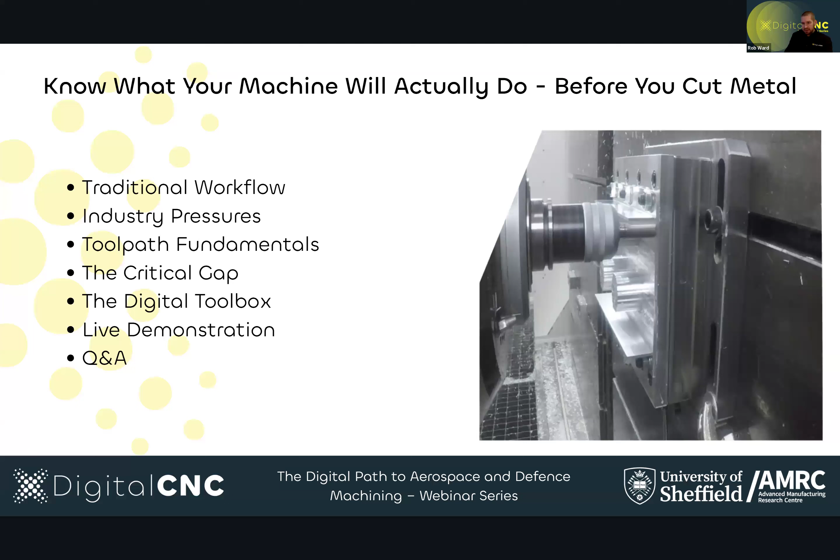So without further ado, this is an incredibly simple slide of what the traditional workflow has been for many years. So this is CAD, CAM, CNC. I've divided it into 2 colors to start off with. On the left hand side, you can see I've highlighted in yellow the digital side of things. So when we change anything here in the digital side, ideally it's free. We know it's not costing us anything.

On the right hand side, in the green there, this is the physical area. So when we want to change something or do anything in here, this is time on machine, this is time on inspections, and this is any iterative stuff we do here where we're not cutting production parts. Effectively, this is costing us time, and this is costing us money as well.

So you can see we go from the CAD model through to CAM, and we take the experience of the CAM engineer, and we do parameter selection, toolpath strategy, etc. We'll post that, so it's a machine-specific G-code, then on the machine we'll listen to it, we'll look and feel. A lot of experience here, could be on-machine edits, back through that, inspections, and then finally, after many iterations, we might be on the way to making production parts as well.

I mean, Rich, is this kind of what you've been familiar with most of your career before you came to the AMRC? Yeah, it relies a lot on the intuition of either the manufacturing engineer or the machinist, depending on how individual companies work and structure how they design the processes to get on machine. But the vast majority of it comes from prior experience and having done it before.

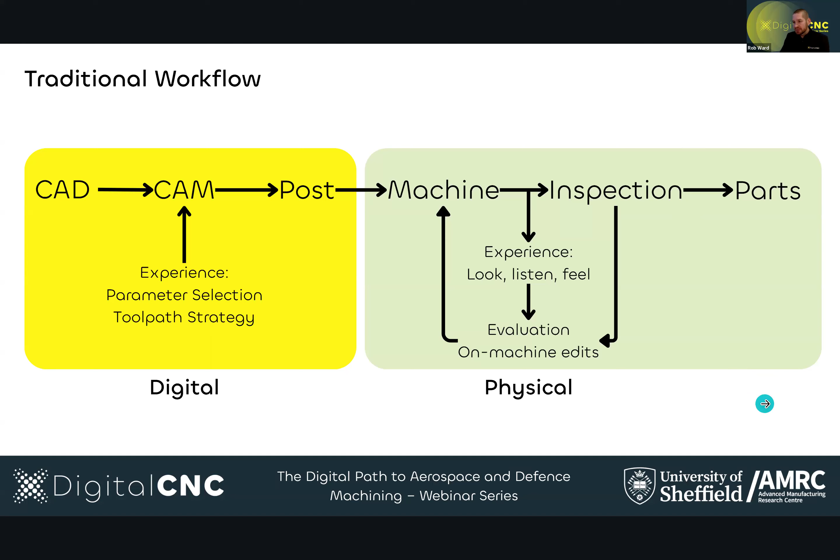So just moving forward a bit, I want to talk a bit about some industry drivers. There's some key changes happening across the aerospace and defense community. Big changes for me include things like new products coming out. We can see here, on the top left, we've got the UltraFan, new gearboxes, which have difficult-to-machine materials. Therefore, we've got new manufacturing processes. We've got the certification requirements. We've got the drive towards digital thread and digital product passports and things.

Then we've got our drive to zero defects, to get things right first time. And right first time we know is absolutely critical, especially for these tier 1, tier 2 suppliers and smaller SMEs. If we start having wasted parts or damage, this is fundamentally critical to their bottom line as well. We can't be doing this.

Sustainability requirements, we know these are coming in. The CSRD directive from the EU will mean that we'll have to do carbon reporting on our OEMs. Eventually that will feed through to our supply chain. It's not quite there yet, but we know a lot of them are getting ready for that. And like we said, probably the most important thing that underpins it all, we've got this skill shortage. So, Rich, from the AMRC's perspective, where do you see these priorities and drivers coming from?

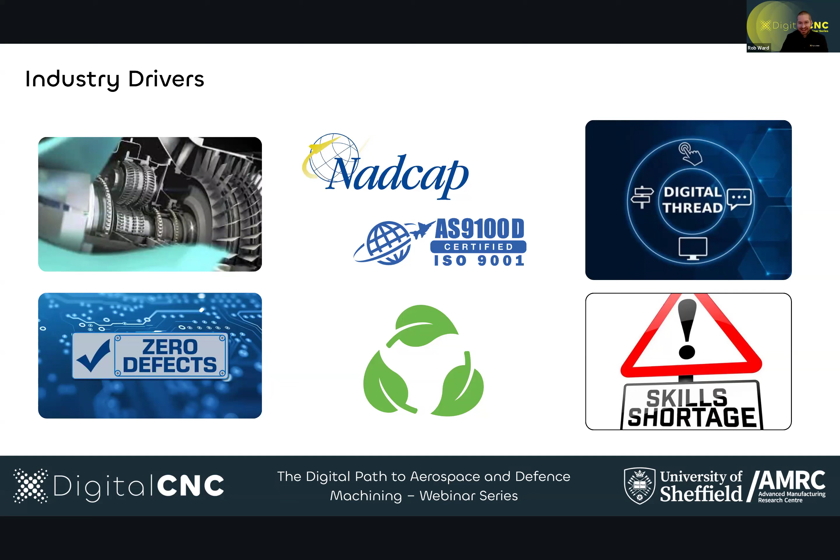Yeah, excellent. I'm glad to actually go to my next slide. So we're talking about things like near-net shape. Obviously, additive is now moving into certain areas. How do we machine those? I'm not going to talk about composites, but that's incredibly complex too, flexible toolware and things. So if we look into the fundamentals now, what's your bread and butter? How do these drivers affect the toolpath and the machining strategies that you're doing?

So we've got a few things on here talking about machining strategy, obviously machine choice, CAM, parameters, which are key, this trade-off between part quality and productivity, which is sometimes not an inverse relationship. It's a really difficult multi-objective optimization problem, where we need to have part conformance, but yet we also need productivity and make it faster as well. So just in terms of your day-to-day and what you're seeing, Rich, talk me through a bit about how you approach some of these and really why they're important.

Yeah, machine choice is just working through the process of how we go around a theoretical project, which we need to decide the machine that we're going to produce the components on. Kinematics plays a key part in that, if we can achieve the dynamics of what we're asking for the process to develop, so the machine choice is really, really important. CAM strategy is becoming more and more crucial. I think it's pretty well acknowledged now that for HRSA type materials, dynamic milling strategies can be massively beneficial.

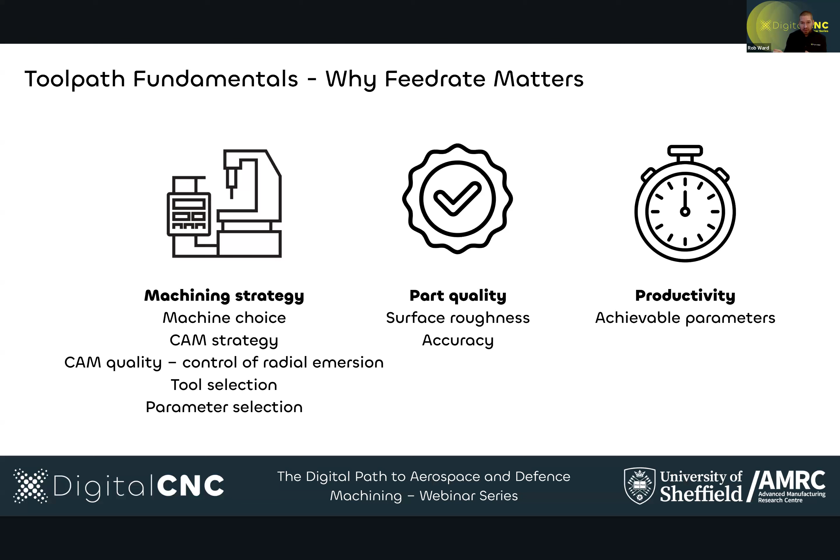So let's look at the next thing, where this is the critical gap, and this is where a lot of my research has been over many years. We know that there's a gap between CAM and the real world. We know this, and we're trying to drive that. But CAM is still absolutely crucial to what we're doing. And the reason we have this is because the machines have got their own kinematics. This is the accelerations, the jerk settings. This is how they behave when you're roughing is different to finishing, for example. We know this.

Different configurations, 5-axis compared to 3-axis, AC kind of configurations compared to swivel heads. Toolpath geometry is so complex, and how we're laying them up, and the impact it has on the actual machine kinematics and the behavior of the machine. The machining tolerance, this is that C-tol that we put in the header information. The difference between machining something at 10 microns and 50 microns could be 100% in cycle time difference, could be doubled, depending on what we're doing and the toolpath type.

Smoothing type is another big one. And within that, the interpolation type, and I know this is very nerdy stuff, which I get into, but there is a fundamental difference in the mathematics behind an 840D controller and a Num one, and Heidenhain. And so when you had a look ahead of 10 in the 840D or 20 in the 840D, and then the new ones, you've got a look ahead of 5,000, it's not a little improvement, it's a fundamental difference in how we compute these things.

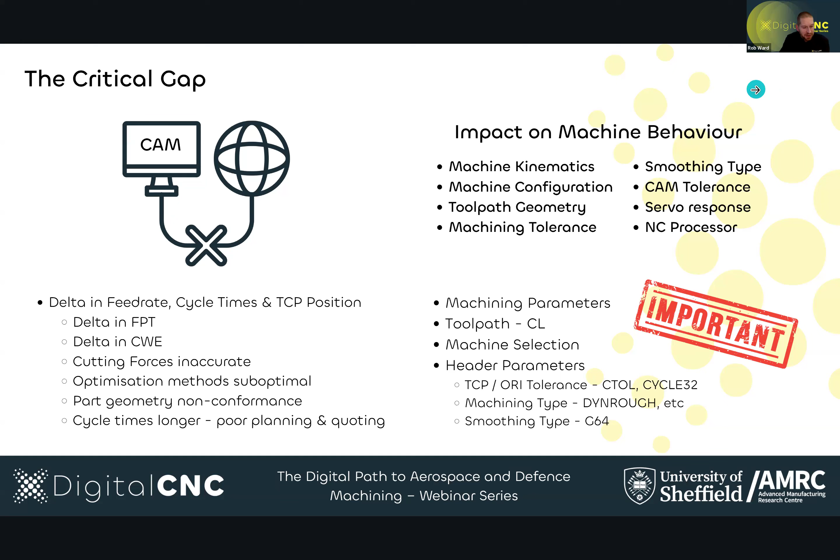Definitely. Good. Just moving on for time. I know we could be here for 2 hours if we wanted to chat about this stuff.

So I'm going to move forward on to what kind of tools are available to us. And Emily, this is more in your wheelhouse now. Emily, I know you spent the best part of 8-9 years benchmarking these tools and have got close relationships with a lot of these companies, so you know quite a lot of them.

On the left-hand side, I've put a list of common CAM and CAD packages that we work with across the board. And then going down diagonally, I've tried to go through the process a little bit, with some of the CAM automation at the top left, and then moving down to on-machine high-speed recording. So Emily, just talk us through some of the key software here. And on the next slide, I've put where it sits in the digital toolbox in terms of the workflow, so we can use both slides to explain some of this.

So we use the majority of the software packages on there at AMRC. One of the unique benefits of AMRC is that we have access to a wide range of different software, so we're not just limited to one CAD package, one virtual machining package, etc. We generally use Siemens NX, CATIA, Hypermill, as well as some of the others for CAM generation. Verification software, we use CG Tech,

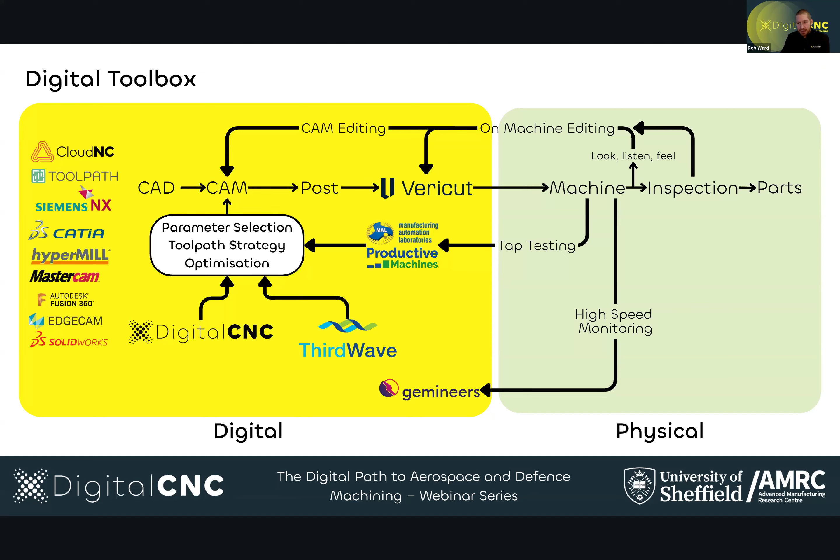What I'm going to do now is bring in a bit of a demo that we had at the AMRC a few weeks ago when we did the AMRC showcase, which was the 2-year event that we hold at the AMRC, the machining group, with all the major aerospace partners. I'm going to relatively quickly go through this because I'm very aware of time. I knew we'd overrun. So here what you can see is CATIA, and this is just a really simple example, just to highlight a unique, simple use case.

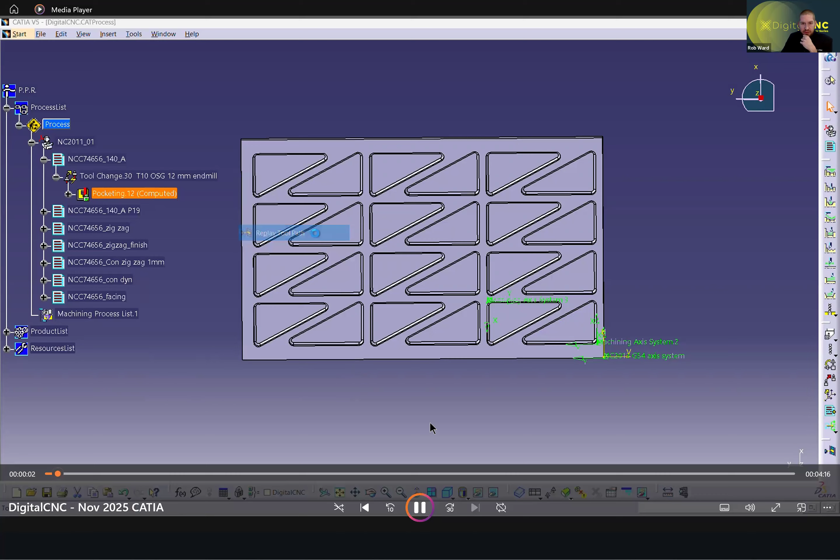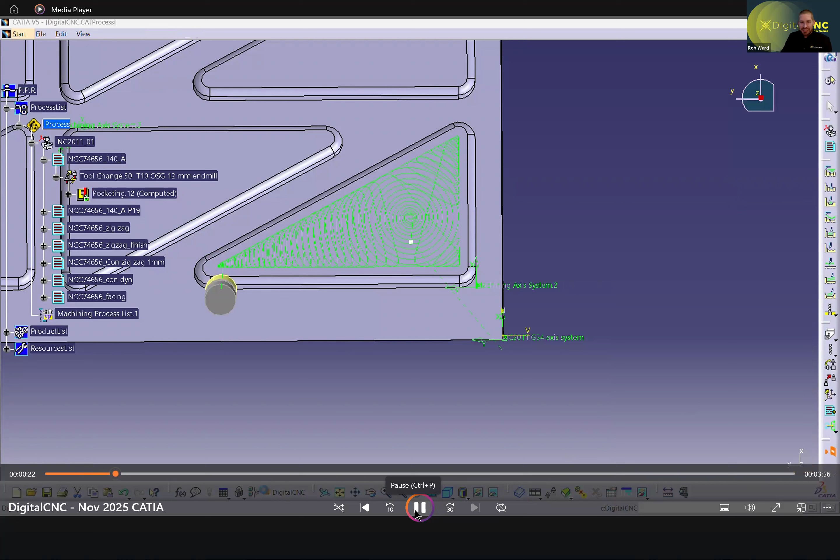So here we're seeing an aerostructure part. This was aluminium, and this was done on the Ecospeed, one of the biggest machines we've got at the AMRC. And you can see here we've got a nice dynamic toolpath. Now, running this through CATIA, in the bottom right, you can just about see it says roughly 19.4 seconds. And we know that's probably going to be relatively inaccurate. When we ran this on the machine, I think it was 36.6 seconds on the Ecospeed on the day.

But actually, you wouldn't want to iterate on the machine, would you? Because the Ecospeed is about £3 million, and you want to be cutting chips all the time. I know companies like GKN are using this to make the wing spars of the A350, I think, and so they want to be turning 24 hours a day. You don't want this off.

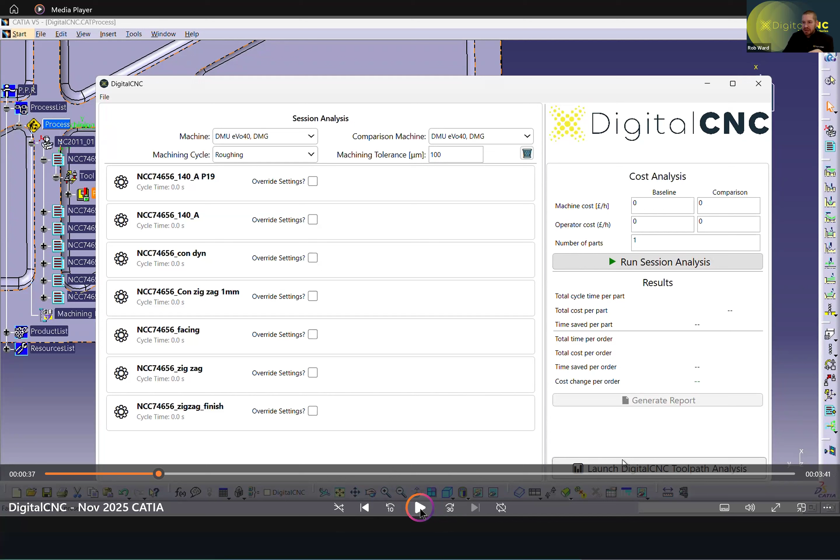So what you can see here is that we've just clicked on DigitalCNC and it's pulled all the parts and the programs through into the main page. We can just click on launch DigitalCNC toolpath analysis. So now we can bring a toolpath through from here, click on the left-hand side. We can click on the machine, so here we click on the Ecospeed. We can click on the machining type, so finishing, roughing, that header information again.

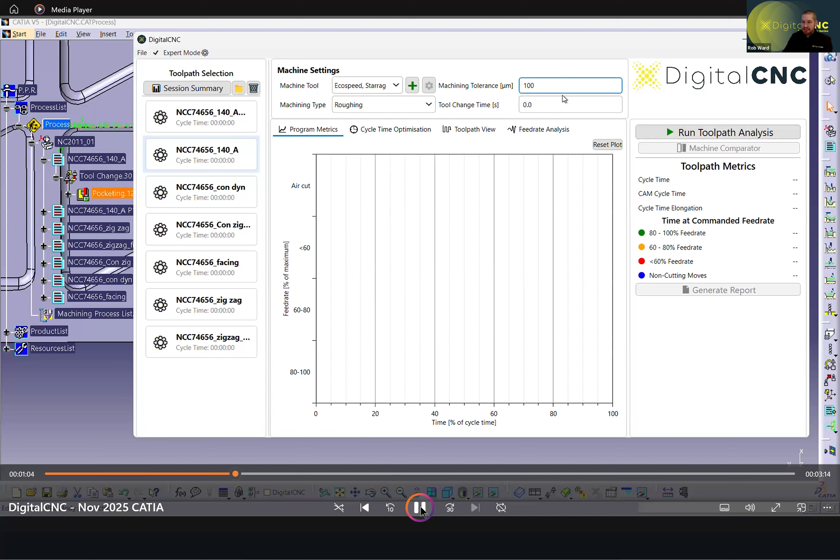And then we can pick the machining tolerance here. So that's that CTOL or the cycle 832 setting. So we can decide what we want to run this at. We're roughing, so we're going to pick something like 100 microns as standard. And then we press run toolpath analysis, and in less than a second we do that instantaneous analysis of what that toolpath looks like. I'll just pause it there.

So you can see in the top right, in the toolpath metrics, it's predicting 36.8 seconds. It's almost exactly what the Ecospeed is, because we're using a generic controller here. We're trying to predict the behavior of multiple machines and get as close as we can. But the CAM cycle time is about 20. So you can see this red bar, it's not hitting the feed rate for the majority of the time. So that should give the operator an understanding to go back into CAM and change the parameters, because you're not going to be hitting the feed rates and you're not getting the feed per tooth.

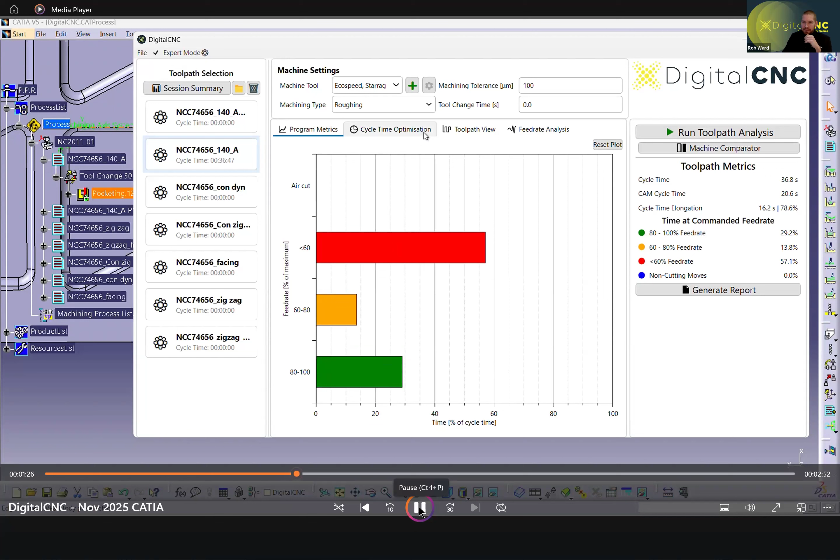And then your cutting forces are not what you think they are. The optimization is not what you think it is. And it all feeds back into it, and instantaneously you can see that here. We can then click on the cycle time optimization, and here we can see what happens if we change the tolerance. This actually is the first time anyone in the world has ever shown this. We know that has a massive impact, but let's go back and show that again a little bit.

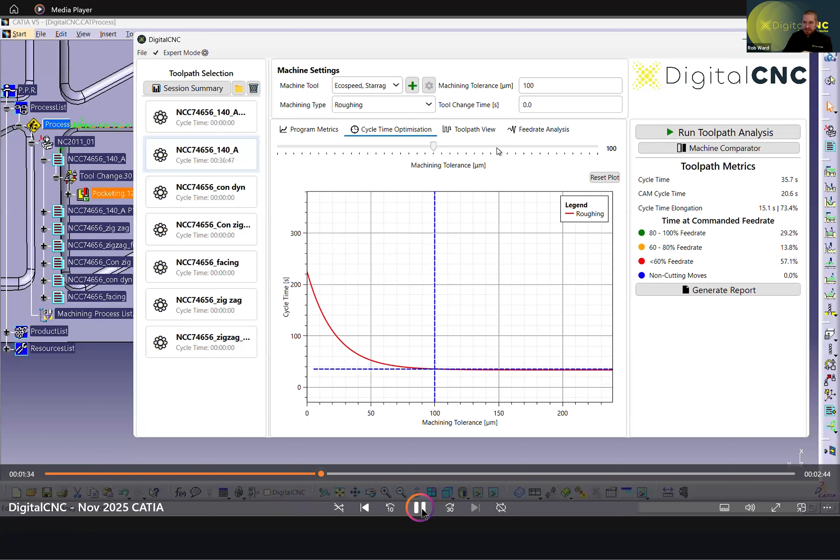But usually it's finger in the air, or we double the NX time, or we check the VERICUT time and add 50% depending on it. But now we've got it exact, and we can see that, which certainly is great for upskilling and training some of the new engineers coming through. We can have a look at our toolpath. We can see areas that we can highlight, and we go back into there.

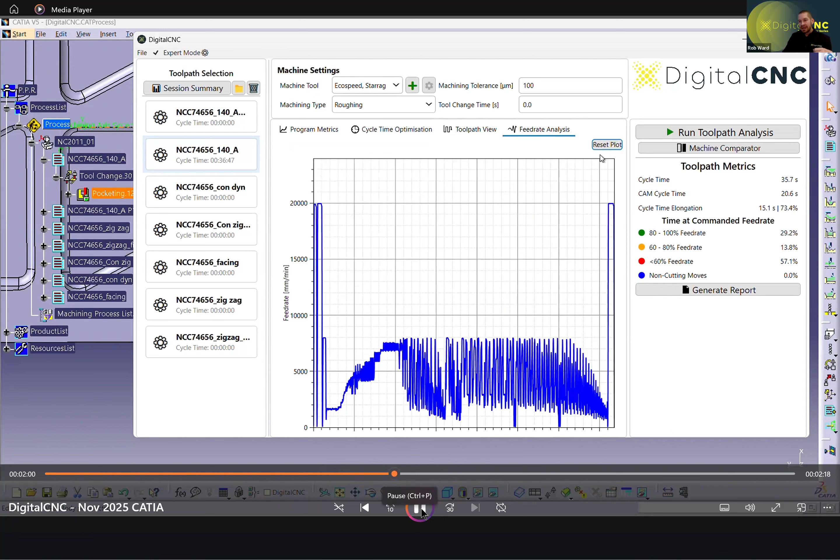And also we can have our feed rate analysis. And we can zoom in here. We can start doing some real detailed things, figure out what's going on, go back into CAM, and we can change that. But this is not connected to the machine. This is purely prior to machining, giving you all that information so you can go and make some decisions.

Now we can also do some analysis on this. On the left-hand side, we've got our standard parameters we've pulled through. On the right-hand side here, we can choose the machine, we can change the toolpath if we want, so we can compare toolpaths against each other, different strategies, which is really important. We can even compare the cycles and machining tolerance. In this example, we're just going to do tolerance here.

And so again, we'll run toolpath analysis, it calculates it immediately, and we can see the difference here. Look at that difference there. We can even put ROI calculators in here, have many parts, and we can see just by changing the tolerance on this amount of parts, it'd be about £14,000 difference. So if you get the tolerance wrong, this has financial implications, and now we've got quantitative metrics which state this, which is great. So we've got data for the first time relating this stuff.

We can even create reports. I think here, we're just changing the machine on this one. What happens if I change this process to a different machine? The C52 is pretty good compared to the Ecospeed, so there won't be too much difference here. Again, 36.8, 33.9 seconds. What does it look like in terms of cost difference? £2,000 if we change that machine. And again, we can create some reports here as well.

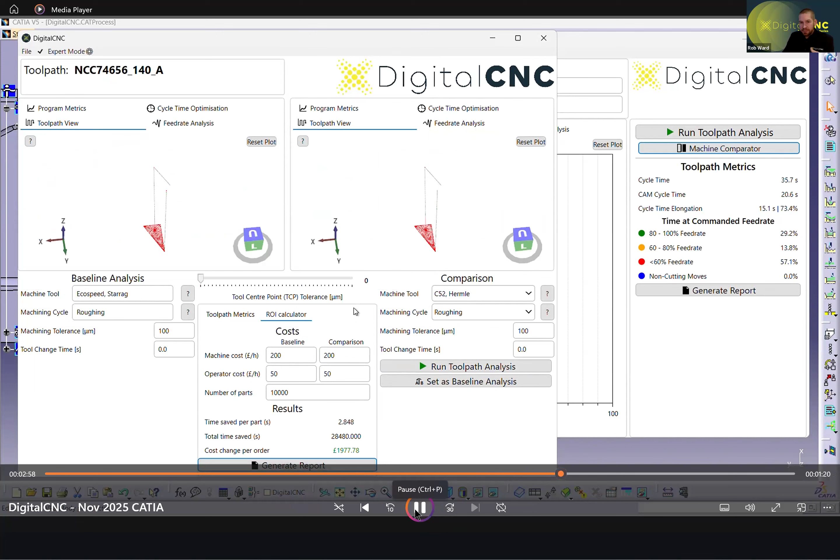So if we want to be doing continuous improvement, we can get some data, give it back to our managers and say, look, we should change this. It's going to save us this amount of money if we go back and change these parameters of any of these fixed processes. This is really handy because for the first time we're giving documentation back to say this change means this amount of money, which is really cool.

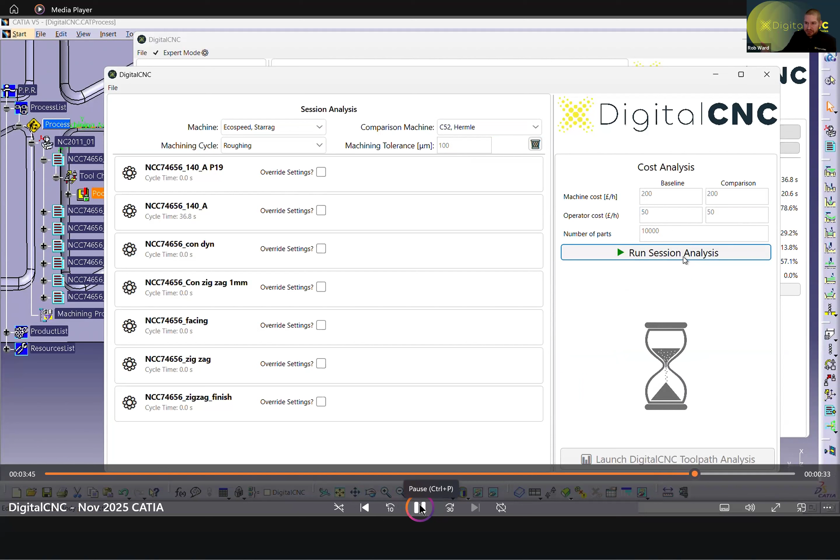But actually what we might be more interested in is the whole part. So on this little demonstration here, we brought everything through. We're going to select a different machine to move it to a different process. And this could be the case that we were thinking about a capital investment decision. Here we can have a look, number of parts, run the full session analysis, and straight away we can see that if we were to change from one machine to a different machine, it's going to save us approximately, in this case, £11,000 in that process.

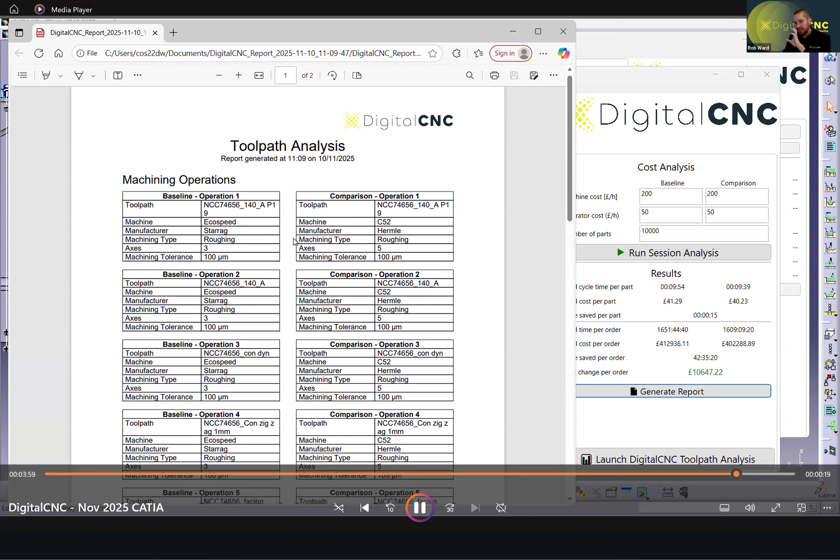It could be the fact that you are doing a quote, and by the time you're quoting, you win the work, but when the work comes in, your machine is no longer available, you've got to put it on an older machine, and it's going to take twice as long. So actually when you're quoting, you probably want to quote on the older machine. And again, in this final bit, we can pull out various different reports based on that and feed that back into the reporting chain.

I'll just stop there because that was really quick.

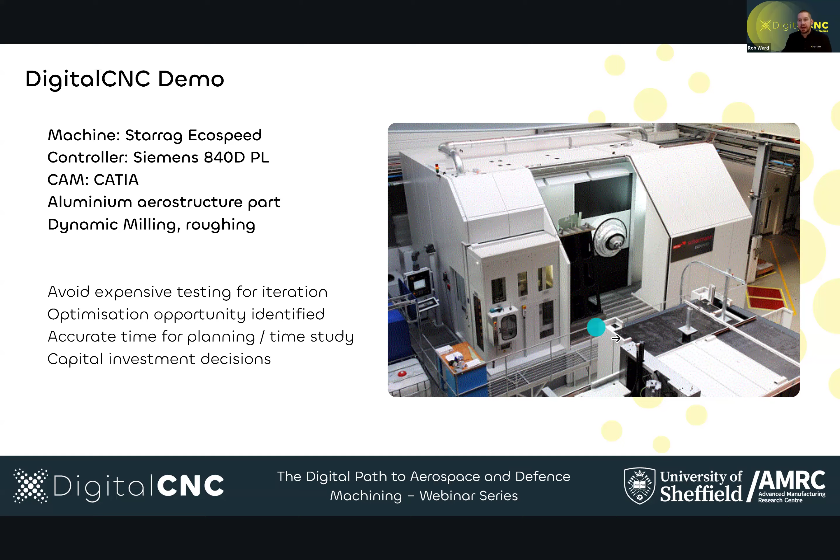A quick way of demonstrating some of the software as well. We're a bit short of time, so it avoids expensive testing for iteration. We can look at areas to optimize. We can do accurate time studies and planning, and ultimately it feeds into those capital investment decisions as well.

So I appreciate that was a bit of a whistle-stop tour, and we probably need to have another six webinars to go through all this stuff. So what I would ask, guys, is what were your takeaways from that and from some of these discussions, just so we can wrap up a little bit?

For me, I think the key one in terms of the software is the integration into the CAM. I was saying this in the very early days of DigitalCNC to you, Rob, it's got to be able to integrate into existing processes if you want the uptake to be as high as possible. If it's another piece of software that needs another setup session to start getting that information out, it's going to hinder the uptake. The fact that it sits in CAM, integrates in, and pulls through all the necessary information is key.

And the other point I want to make is if you're not considering cycle 832s and CTOL tolerances, bear in mind that the majority of machine tools will default to conservative tight tolerances that will massively restrict the productivity of the platform. It's up to you as an ME, a machinist, or a planner to make sure you're using the correct machine setting tolerances and CAM tolerances to get a productive process.